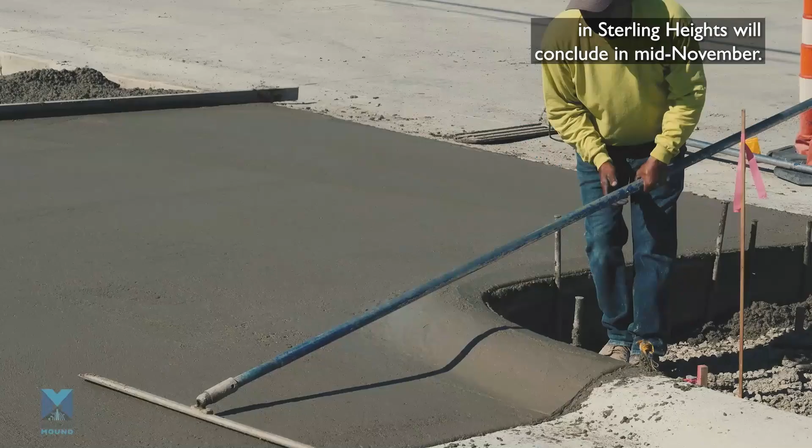All driveways to businesses and residents are complete and will be open without any restrictions when traffic is switched to the two right lanes along northbound and southbound Mound Road from 15.5 Mile Road to M59.

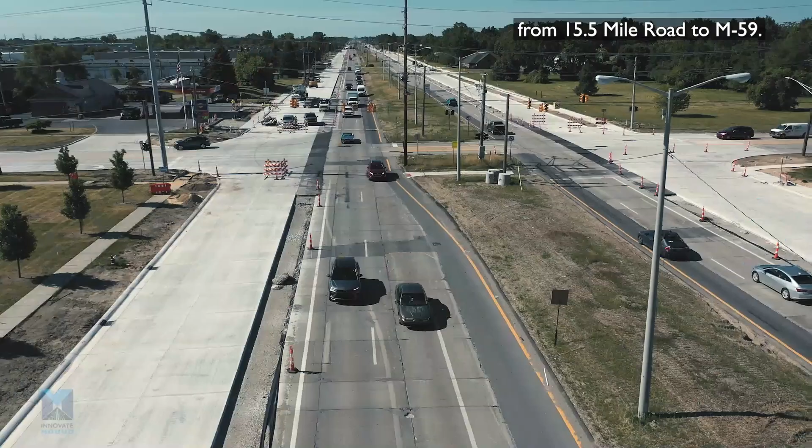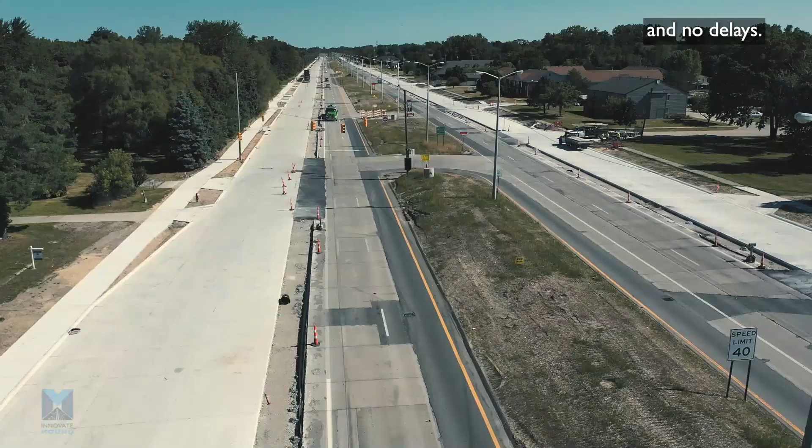Also, the additional lane along northbound and southbound Mound Road from 17 Mile Road to M59 has been successfully constructed with minimal conflicts and no delays. This will provide additional traffic capacity within this stretch of Mound Road.

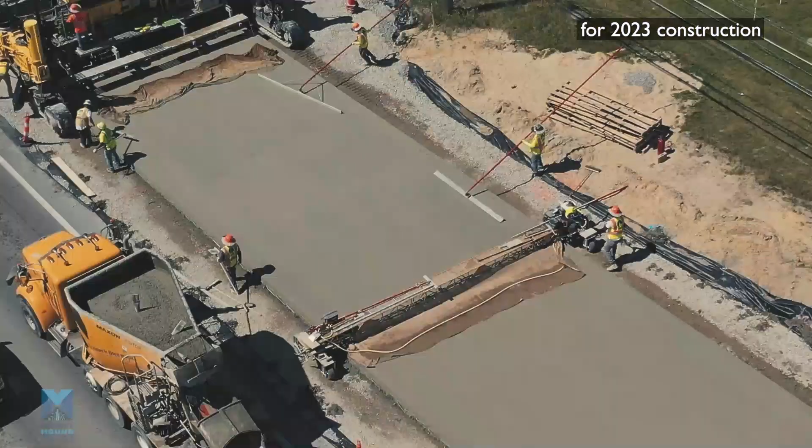Preliminary work is now underway on the south segment of the project in the city of Warren. This includes temporarily widening the roadway for 2023 construction and other work that will continue through the winter months. Major construction on the south segment from 15.5 Mile Road to I-696 will begin in March of 2023.

To help complete the project, the county recently received $32 million from the state of Michigan and an additional $2.5 million in federal funding. The anticipated end date for all major construction is June 2024.

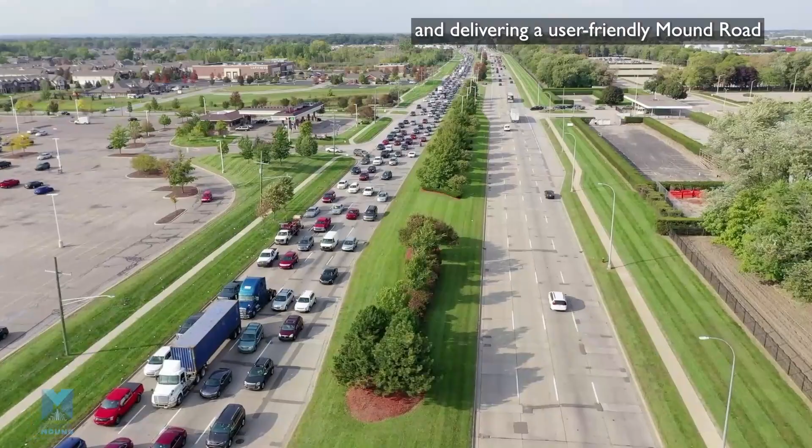We look forward to completing this project and delivering a user-friendly Mound Road that is safe for motorized vehicles, bikes, and pedestrians with state-of-the-art design and smart technology. Thank you again for attending today and for your patience while we innovate Mound.

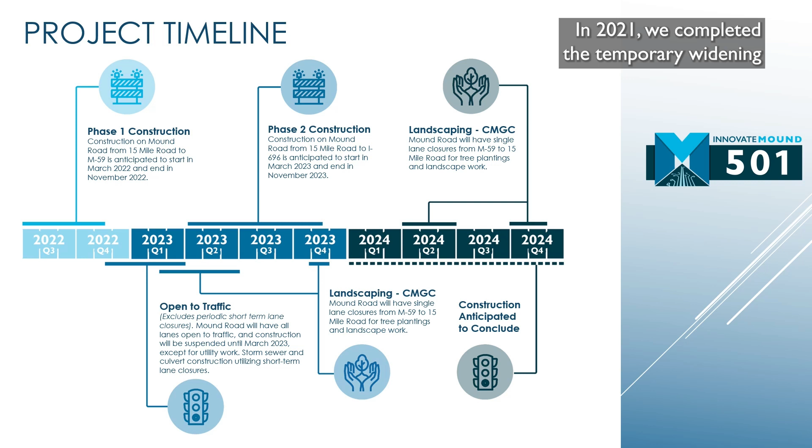Here you see an overall project timeline as we work through construction. In 2021, we completed the temporary widening from M59 to north of 15 Mile Road to then start construction in the early spring of 2022.

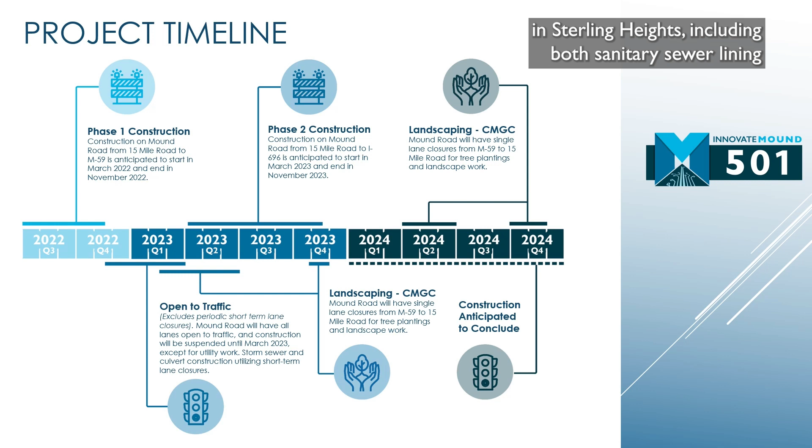During spring and summer 2022, we continued work with municipal utility repairs in Sterling Heights, including both sanitary sewer lining as well as water main and fire hydrant replacements and repairs.

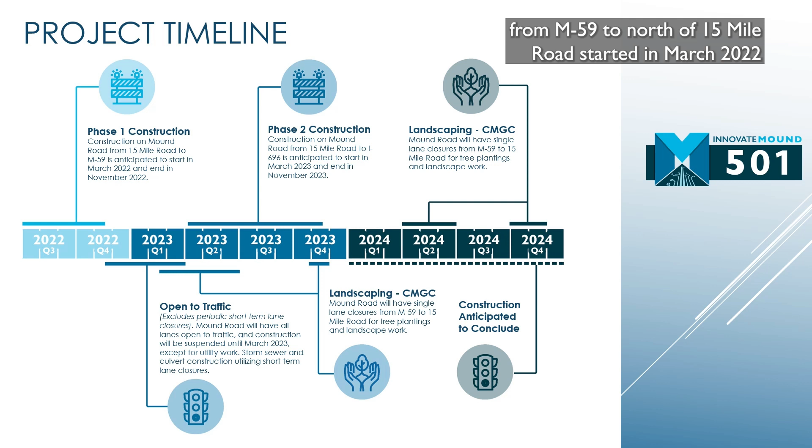The main reconstruction of the north segment of the project from M59 to north of 15 Mile Road started in March 2022 and runs through November 2022. Traffic has been maintained in two inside lanes from the temporary widening installed in 2021.

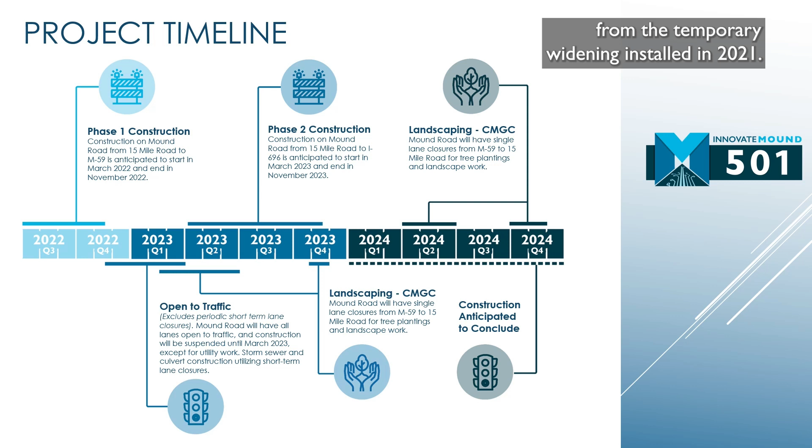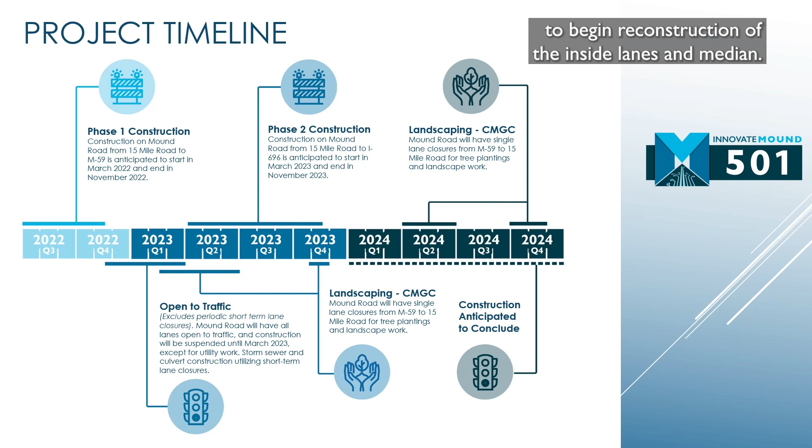We recently switched traffic with two lanes maintained in each direction on the newly reconstructed outside lanes to begin reconstruction of the inside lanes and median. The overall open to traffic date for 2022 construction is in late November 2022.

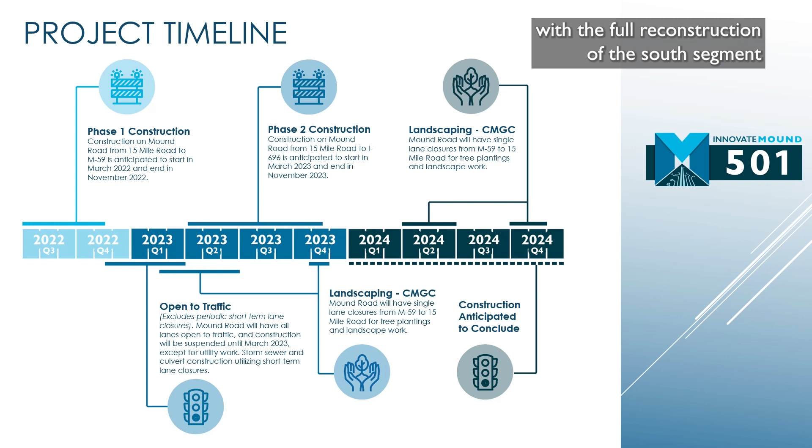During winter 2022 to 2023, we will have single lane closures to complete some municipal utilities work. In spring 2023, we will then start the full reconstruction of the south segment of the project from north of 15 Mile Road to I-696, until the end of November 2023.

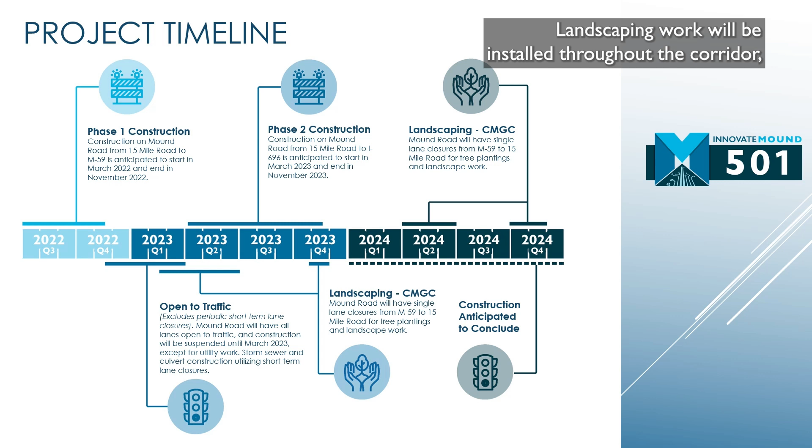Landscaping work will be installed throughout the corridor, which will be discussed later in the presentation.

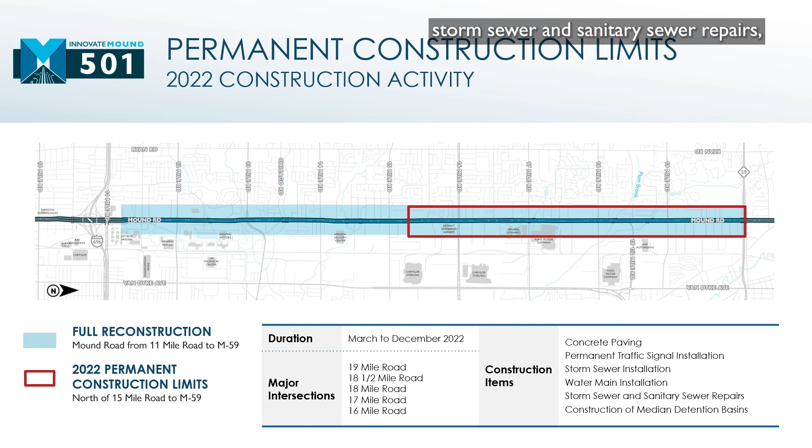This slide shows the permanent construction activities ongoing in the north segment of the project for 2022 work. Concrete paving, permanent traffic signal installation, storm sewer installation, water main installation, storm sewer and sanitary sewer repairs, and construction of median detention basins are taking place.

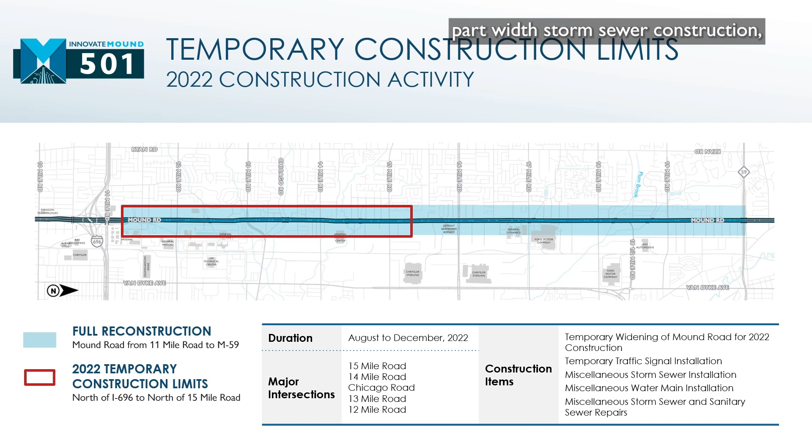In this segment, construction includes temporary widenings to maintain traffic for the reconstruction in 2023, temporary traffic signal installation, part-width storm sewer construction, and beginning some of the municipal utility repairs in the City of Warren, including both the water main and sanitary sewers. We are also working with the design builder to complete structure work on the south end of the project, including the construction of the Bear Creek Culvert and the McCoy Drain Culvert replacements.

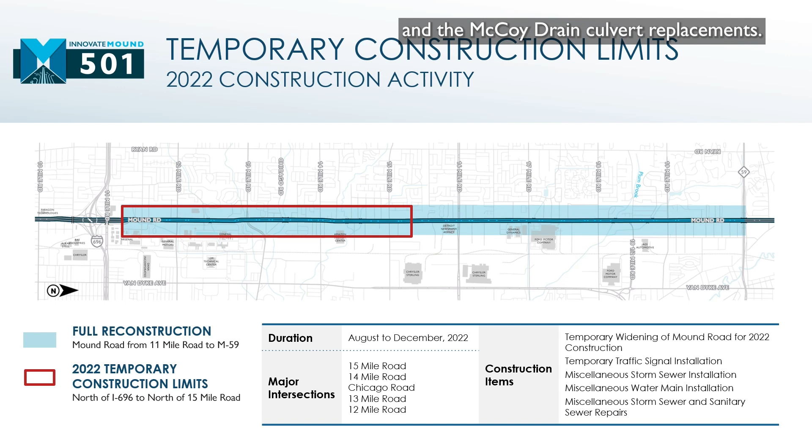These culverts will be reconstructed in the winter months. This slide shows the permanent construction activities in the south segment of the project for 2023 work.

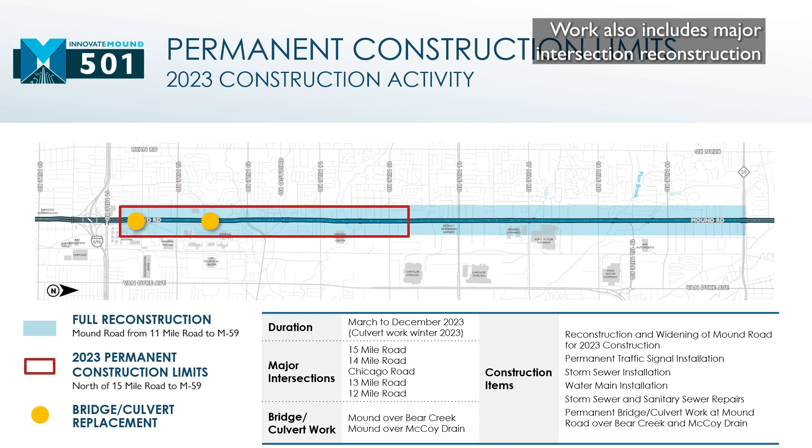Full reconstruction of the pavement includes a new open graded drainage course, under-drain system, new concrete pavement, installation of new signing, traffic signals and pavement markings, as well as storm sewer repairs, new storm sewer crossleads, and drainage structures. Work also includes major intersection reconstruction at 15 Mile Road, 14 Mile Road, Chicago Road, 13 Mile Road, and 12 Mile Road.

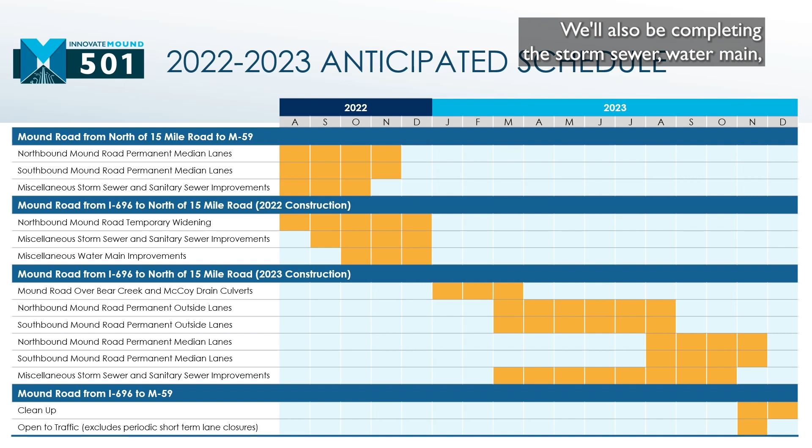This is the anticipated construction schedule for 2022 and 2023. Reconstructing both bounds of Mound Road, northbound and southbound, began in March 2022 and runs through November. That work will include intersection work during Stage 1 construction as well as Stage 2 construction. We'll also be completing storm sewer, water main, and sanitary sewer repairs throughout 2022 in the northern segment of the project.

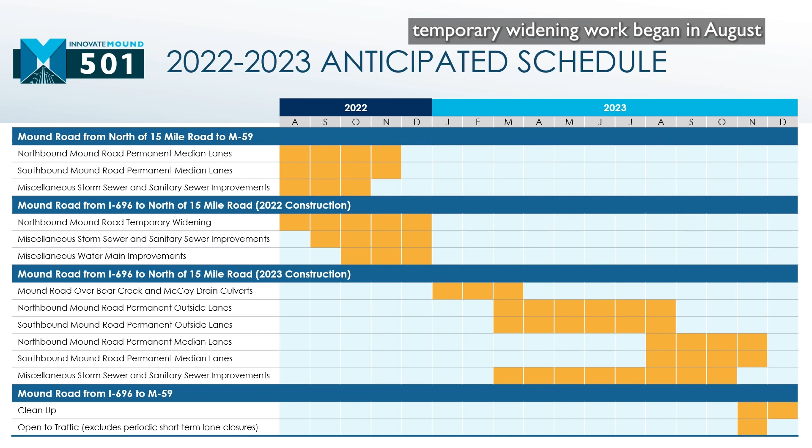Moving on to the south segment of the project, from I-696 to north of 15 Mile Road, temporary widening work began in August and will run through the end of November. Storm sewer, sanitary sewer, and water main repairs are ongoing in September and will run through the seasonal suspension. We'll have temporary lane closures daily to continue that work in a productive manner and get an early start on 2023 construction. Water main work will start in early October, and that work will continue through the winter of 2023, similar to how work progressed in 2022.

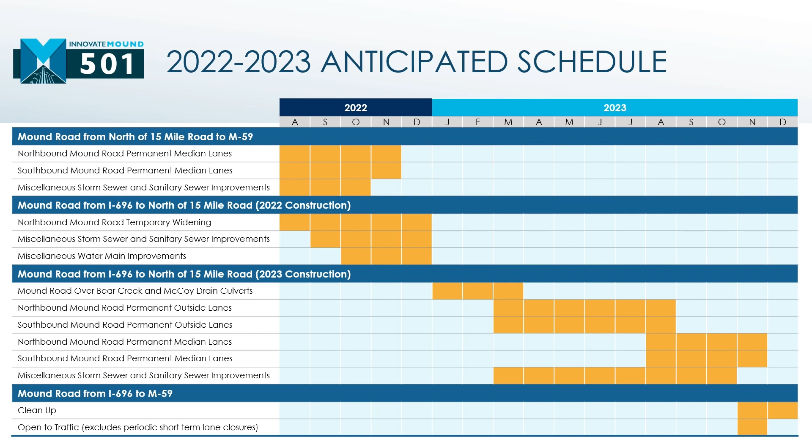Finally, cleanup and short-term lane closures will take place in November and December of 2023, and landscaping work will continue into 2024. One of the features that is an important part of this corridor improvement includes adding 9 detention basins that will be installed from M59 to I-696.

Due to the increase in impervious surface from the additional lanes from 17 Mile Road to M59, and to meet federal water quality requirements for storm water, 9 detention basins will be installed in the median. The detention basins help ensure runoff occurs at an acceptable rate. The basins will help increase water infiltration during rain events and ensure that stormwater quality discharging to the waters of the state is maintained.

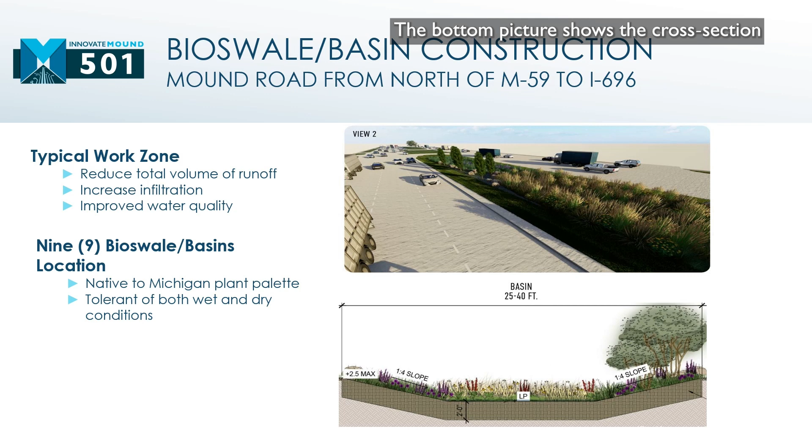The top picture is a rendering of what the public will see once vegetation is established around the detention basin. Michigan native plant species that are tolerant to both wet and dry conditions will be used to ensure the basins operate as expected and maintain the aesthetics of the corridor. The bottom picture shows the cross-section of the detention basins.

There are also numerous private utility companies within the corridor, including DTE, Verizon, and Comcast, who have facilities both overhead and underground. Utility companies are taking this opportunity to upgrade their facilities. One of the major utilities in the corridor, DTE, will relocate transmission lines and poles to the east side of Mound Road to accommodate the installation of the multi-use path that will be constructed on the west side. Instead of wood poles, DTE is installing steel poles from 14 to 18 Mile Road. Communication companies will also be relocating to new poles that will be provided by DTE.

Another major improvement from Consumers Energy is replacing the medium and high pressure gas line in the median from 11 to 14 Mile Road. Finally, street lighting will be upgraded to new energy-efficient LED lighting throughout the corridor in both the City of Warren and the City of Sterling Heights.

Traffic signal and intelligent transportation system improvements will be made, including signal mast arms that will be installed at all signalized locations. The configuration will be box span, which allows for better alignment of the signal head. In the travel lane, the pavement marking stop bars will be further away from the signal to provide more visibility to drivers. The signal will also have adaptive traffic signal control that helps optimize traffic flow. Pedestrian signals are being installed at the intersection for crossings.

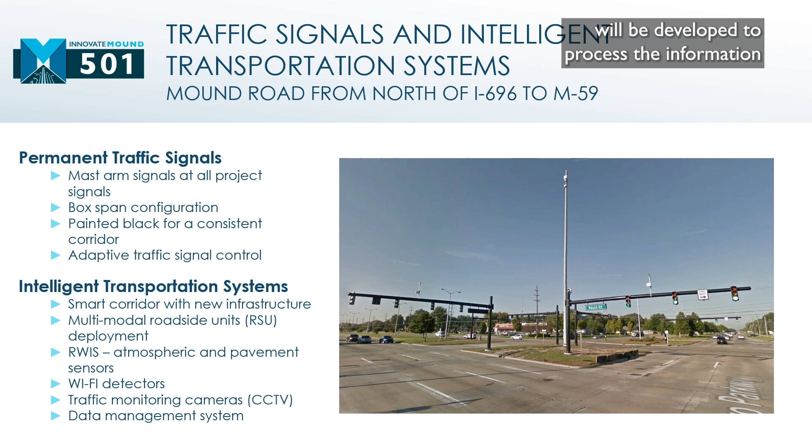In conjunction with all the different technologies that are being installed, a data management system will be developed to process the information to optimize the operation of the corridor for years to come.

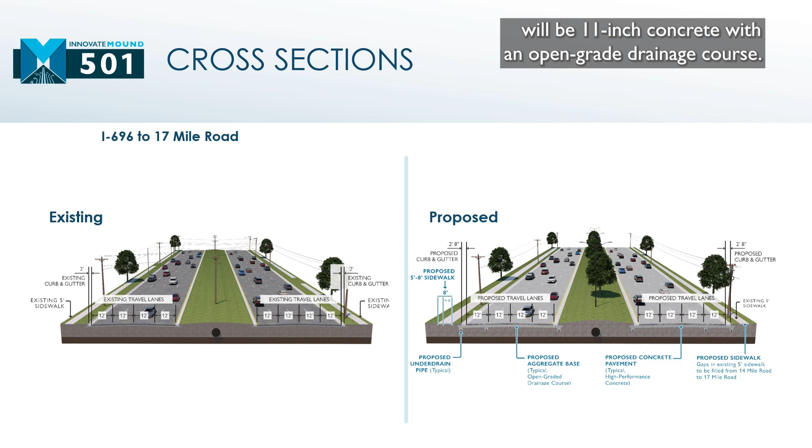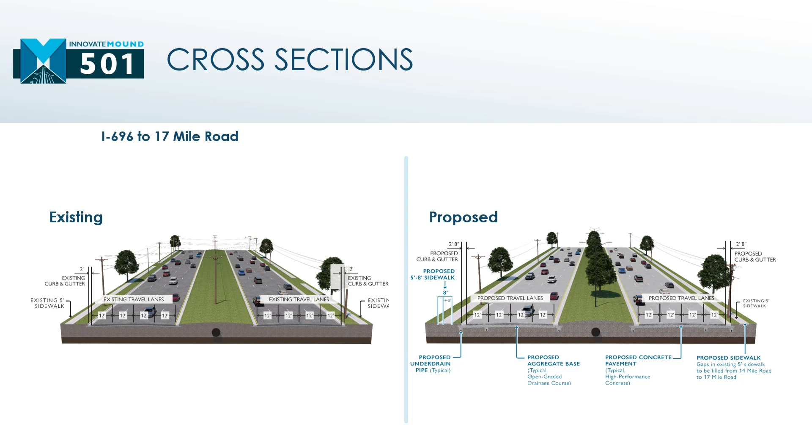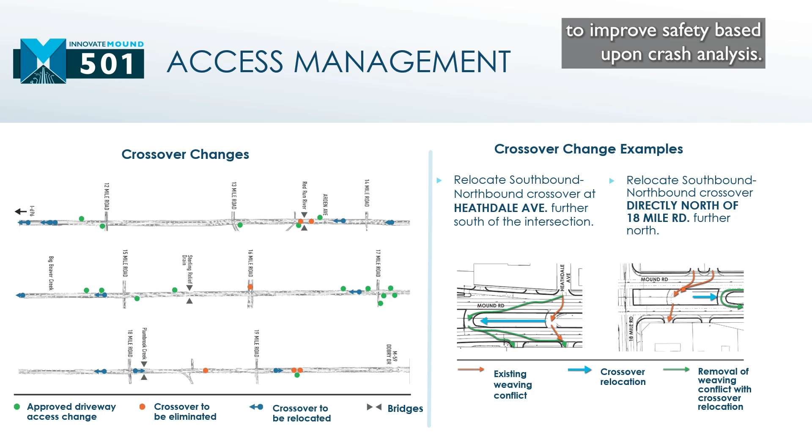Analysis was completed to review the safety of the crossovers within the corridor. On the left, a few crossovers are slated to be relocated to improve safety based upon crash analysis. The right-hand side shows an example of a crossover change at Heathdale Avenue near I-696. At this location, the crossover will be shifted to the south, which will remove the weaving conflict from the neighborhood on the west side to go northbound to improve safety.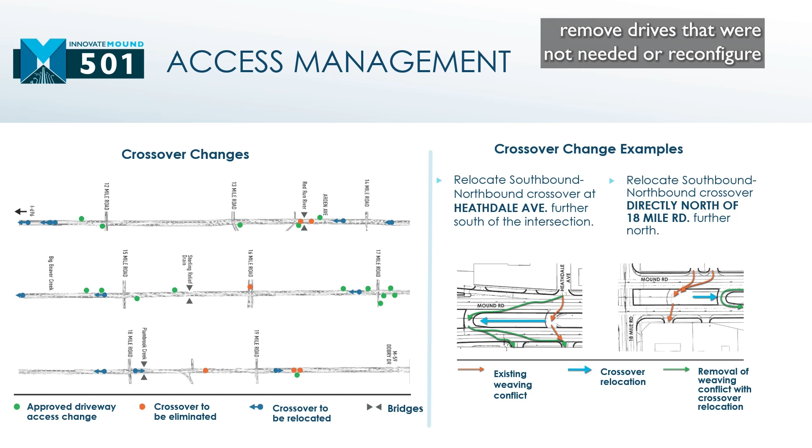Driveway access was also reviewed, and changes will be constructed as agreed upon. Some of the changes were to consolidate drives, remove drives that were not needed, or reconfigure to improve safer access. These changes will further improve safety in the corridor.

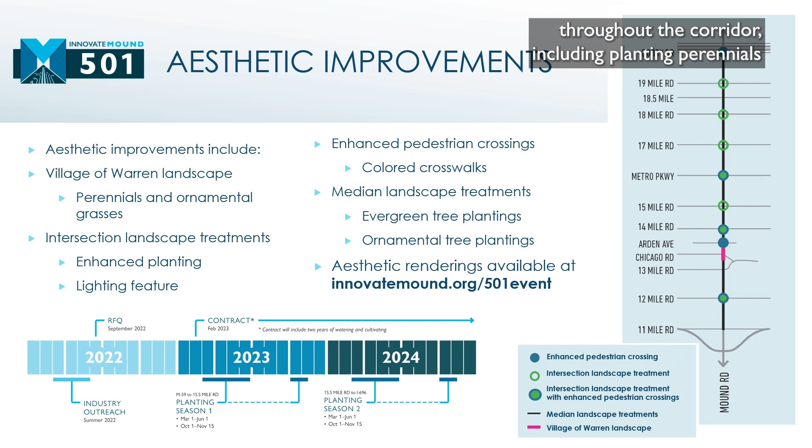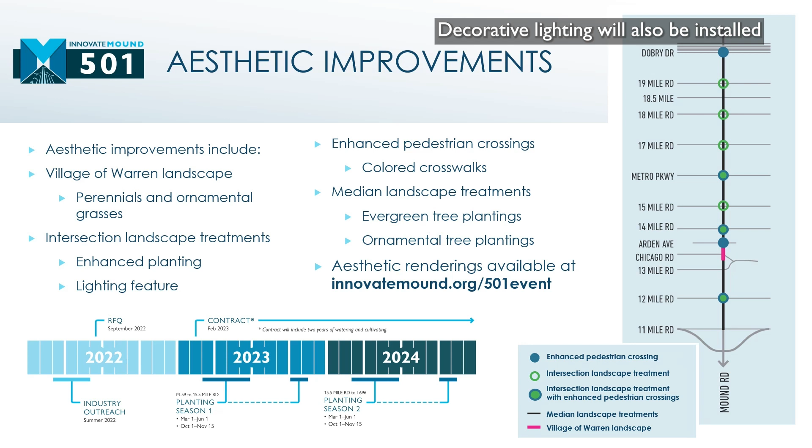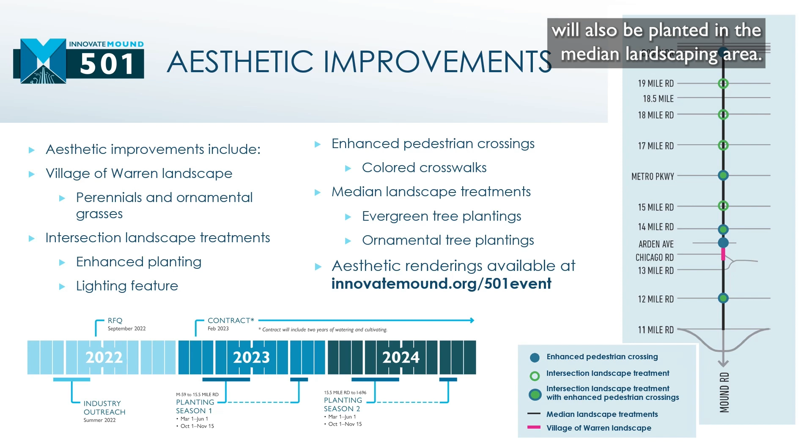Aesthetic improvements will be installed throughout the corridor, including planting perennials and ornamental grasses to enhance landscaping in the village of Warren and at intersections. Decorative lighting will also be installed at selected intersections. Crosswalks will be colored to provide contrast and improve visibility in the median, and evergreens and ornamental trees will also be planted in the median landscaping area.

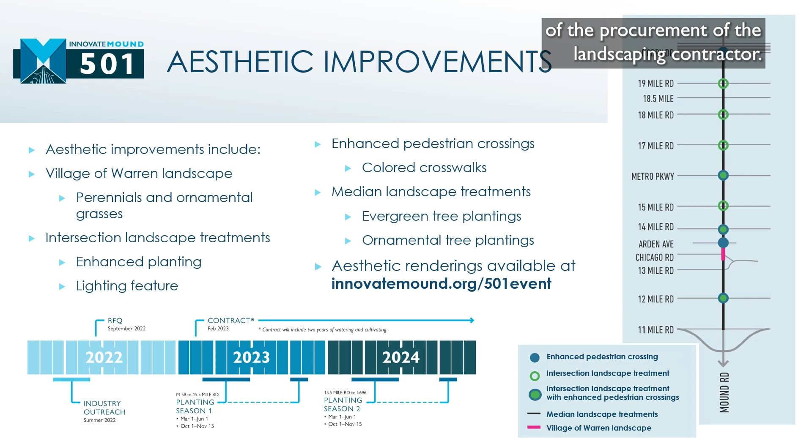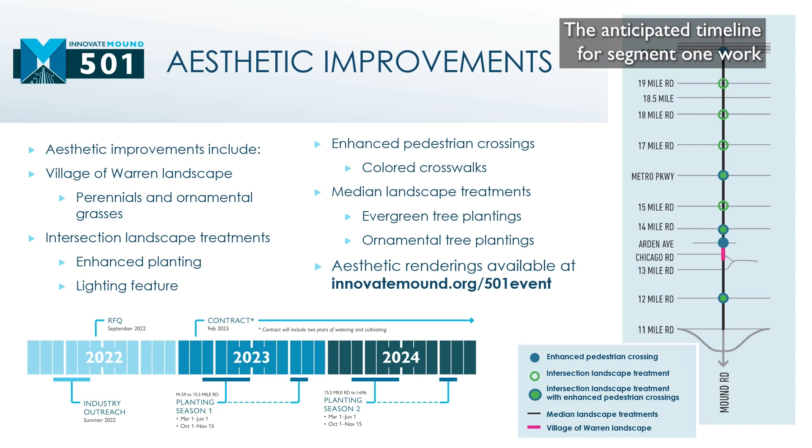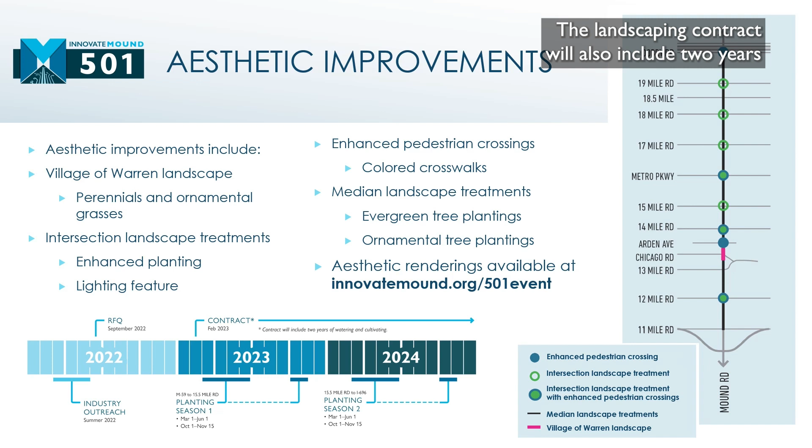On the right, the map shows a location overview of the aesthetic features. The timeline at the bottom provides an overview of the procurement of the landscaping contractor. Once the road contractor has completed the segment, landscaping will begin. The anticipated timeline for Segment 1 work is spring and fall of 2023. Segment 2 landscaping will follow in spring and fall of 2024. The landscaping contract will also include 2 years of watering and cultivating to ensure that landscaping is established.

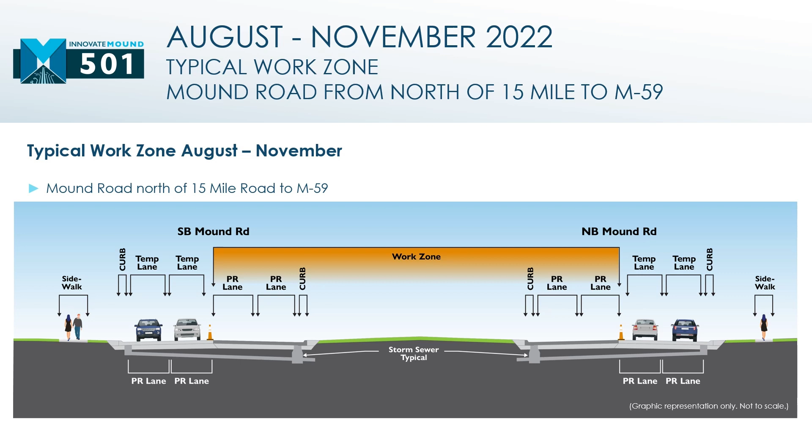On this slide, you will see a cross-section of northbound and southbound Mound Road that illustrates how live vehicular traffic will be configured and where the live work zone is from August 2022 through November 2022. The work zone will be in the 2 inside lanes closest to the median, where construction will focus on reconstructing and beautifying the median. Vehicle traffic will be in the outside 2 lanes to drive on the brand new permanent pavement that was constructed from March to August 2022.

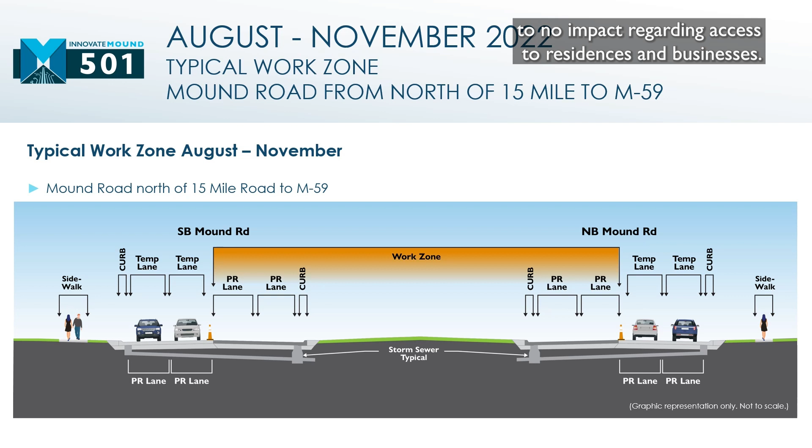At this point, all driveways will be open in their permanent state, so there should be very little to no impact regarding access to residences and businesses. On the south end of the project, from I-696 to north of 15 Mile Road, traffic configurations are similar to what took place last year during the temporary widening work from north of 15 Mile Road to M-59.

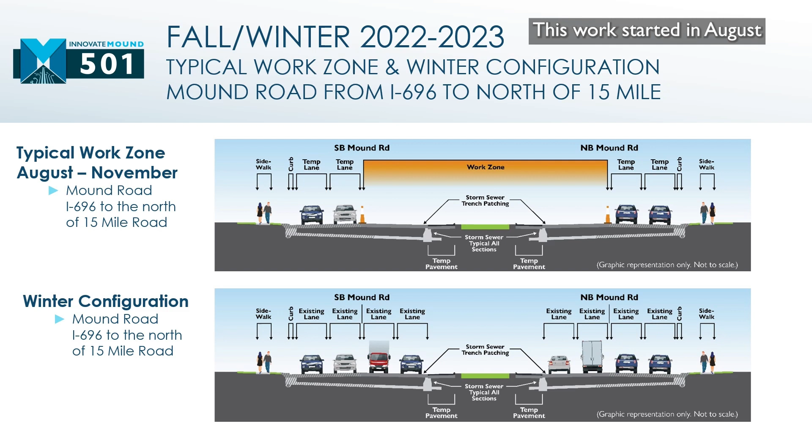To conduct similar temporary pavement widening, storm sewer, and water main upgrades and repairs, traffic will be pushed to the outside lanes to ensure the contractor has enough space to conduct the required work within the median area. This work started in August and continues through November 2022 until the seasonal suspension. The winter configuration, shown at the bottom, depicts the normal Mound Road traffic configuration with the newly installed temporary pavement. The temporary pavement will not have any traffic on it during the winter, but it will be there.

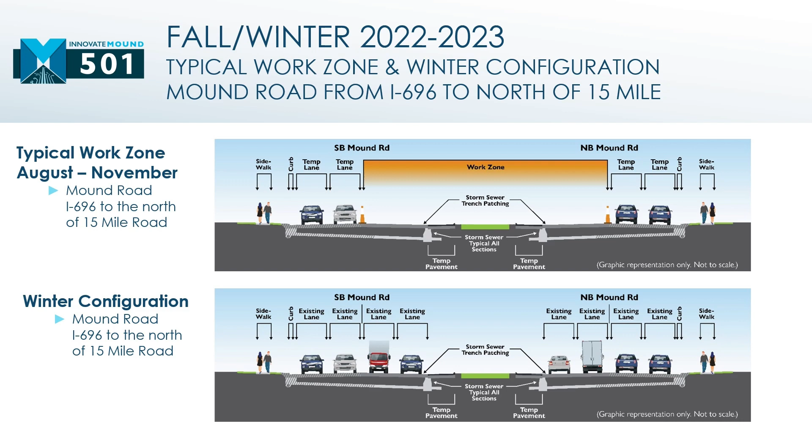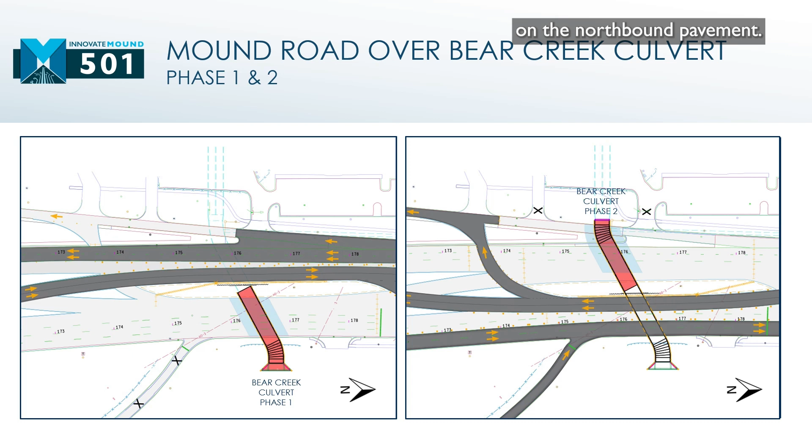During Phase 2, the west side of the culvert will be constructed. 2 lanes of northbound and southbound Mound will be maintained on the northbound roadbed. 2 lanes of southbound traffic will be crossed on the northbound pavement. Access to businesses and side streets will be maintained during culvert construction.

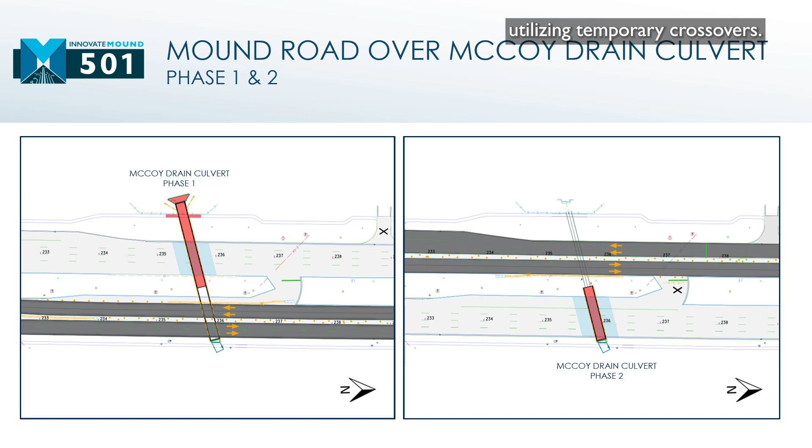The McCoy Drain Culvert will be constructed utilizing temporary crossovers. During Phase 1, the west side of the culvert will be constructed. 2 lanes of northbound and southbound Mound will be maintained on the northbound roadbed. 2 lanes of southbound traffic will be crossed on the northbound pavement.

During Phase 2, the east side of the culvert will be constructed. 2 lanes of northbound and southbound Mound will be maintained on the southbound roadbed. 2 lanes of northbound traffic will be crossed on the southbound pavement. Access to businesses and side streets will be maintained during culvert construction.